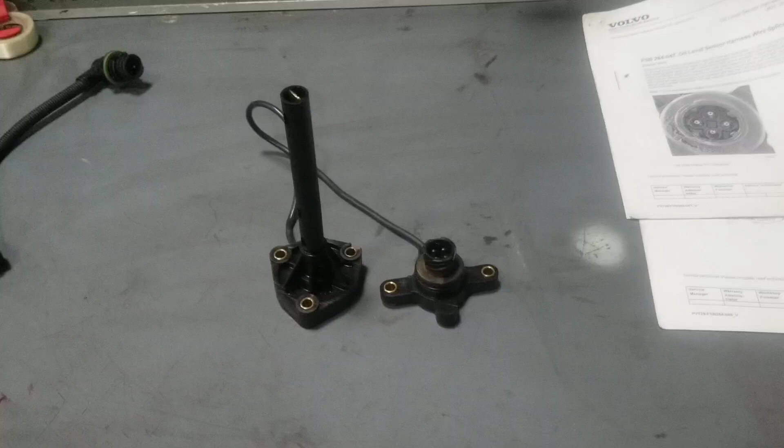Hello, this is an oil level sensor. It is located at the bottom of your oil pan. So it's installed, it sits right about something like this. Bolts down right there, the wiring goes up. Here's the sensor, and it sits next to the dipstick, and this is the fill tube that goes in there.

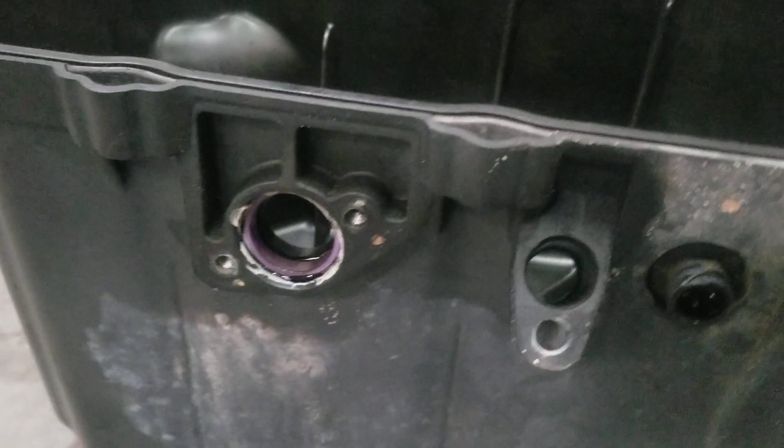So I'm going to talk about the sensor a little bit, and then I'll take it apart. Probably not much to see, just a bunch of plastic. Probably have to break it to take it apart. And the sensor is most likely not going to cause a check engine light.

It probably won't do a check light, and you won't be able to read the oil level, and you'll see it when you look for the codes. You'll see it there. Other than that, it doesn't really show up as a problem unless you're looking to check your oil level.

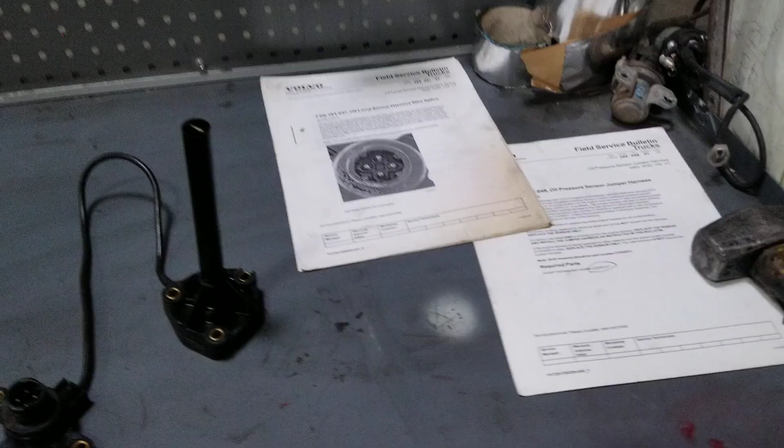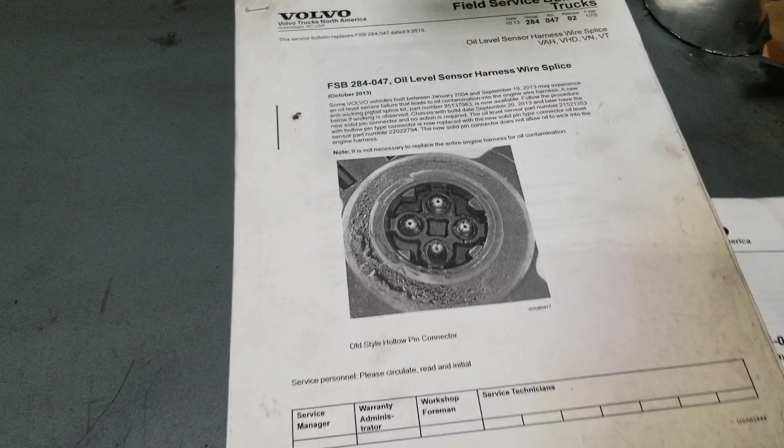I got two FSBs on this sensor. They're kind of old, but if you have an older truck with still an old style sensor in there, should be some good information. So what you're looking for is, this is a picture of a connector. It's an old style connector, pins inside the oil level sensor.

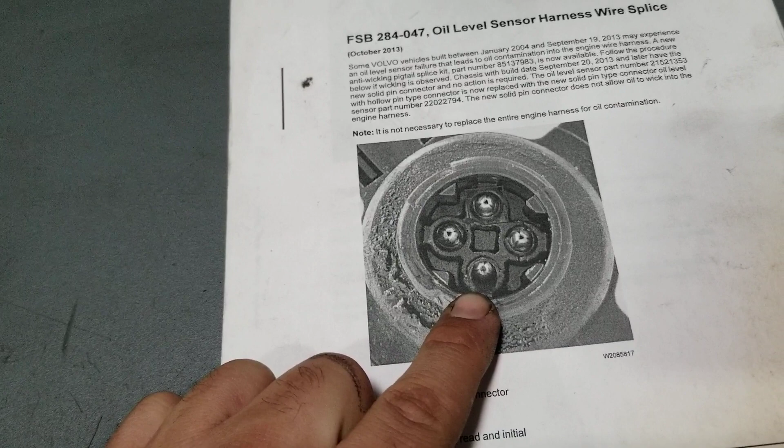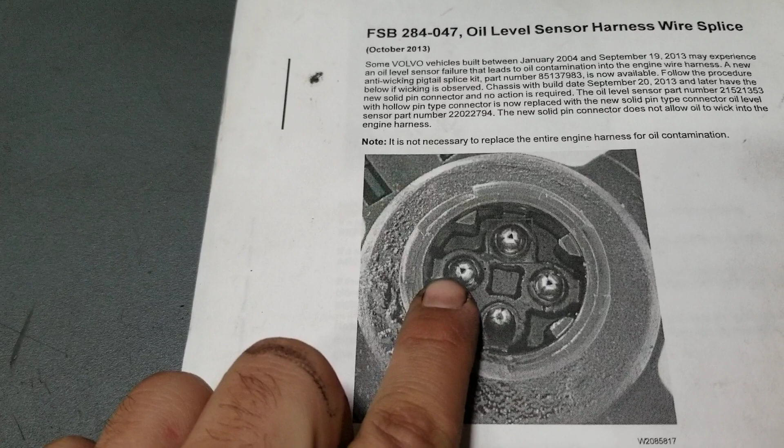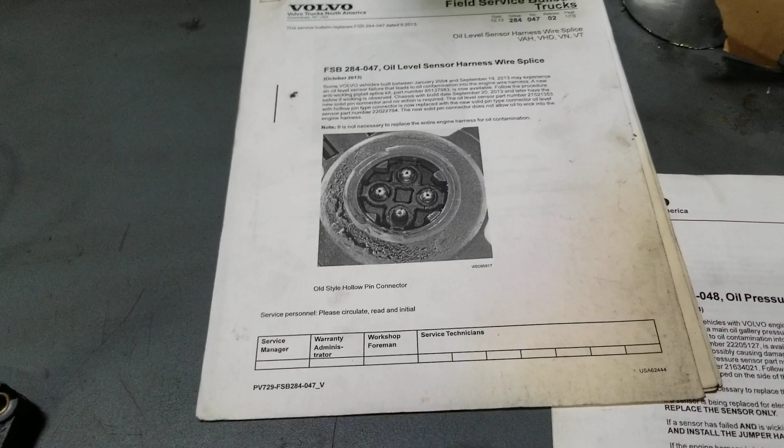This is the old style. You notice how there's a hole inside the pin. The reason why they got rid of the hole inside the pin is because they had oil come out through the sensor, through the wiring, wick all the way up into the engine harness, and then goes into the ECU, and you have all sorts of weird codes until you clean out the connector, and then you're okay for a while - it's a temporary fix when you clean out.

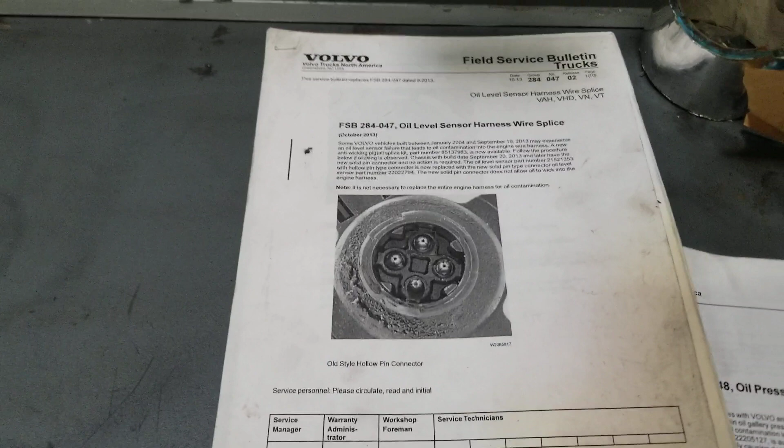So the procedure to fix that would be installing a wicking harness. It's like a jumper harness that prevents oil from going down into the sensor after you replace the sensor. You can also use this as a tool. I use it as a tool. I have two of these.

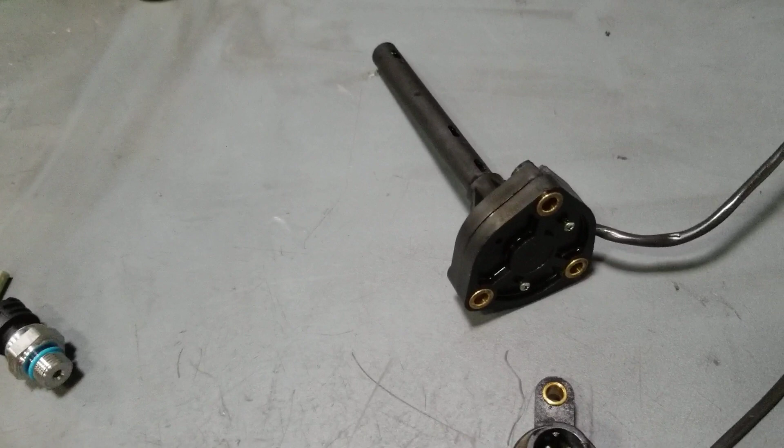Also, part numbers. This part number of this oil level sensor is 220-22794, but that's the old one. It supersedes to 220-7993. Mack and Volvo are the same, and I'll list that in the description. Someday I will figure out how to put part numbers on the screen so you don't have to go to the description, but I'm working on that one.

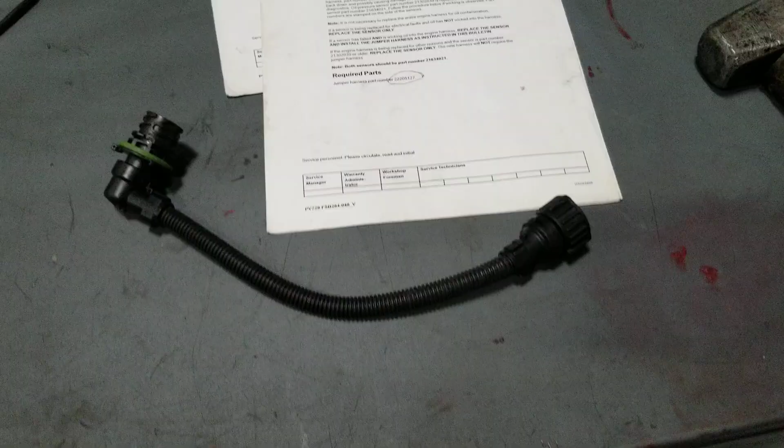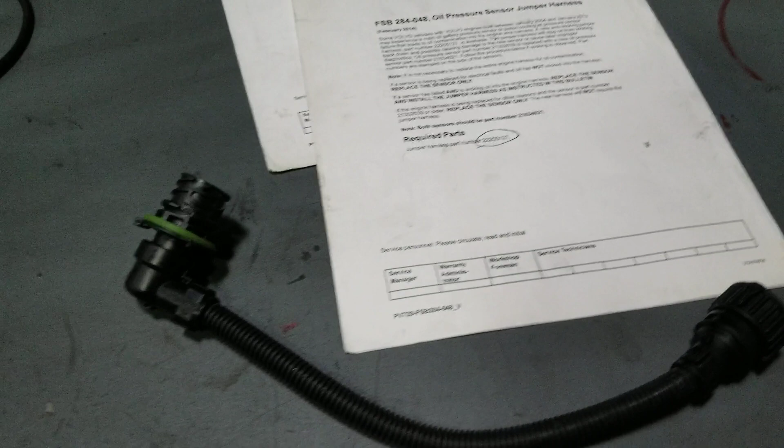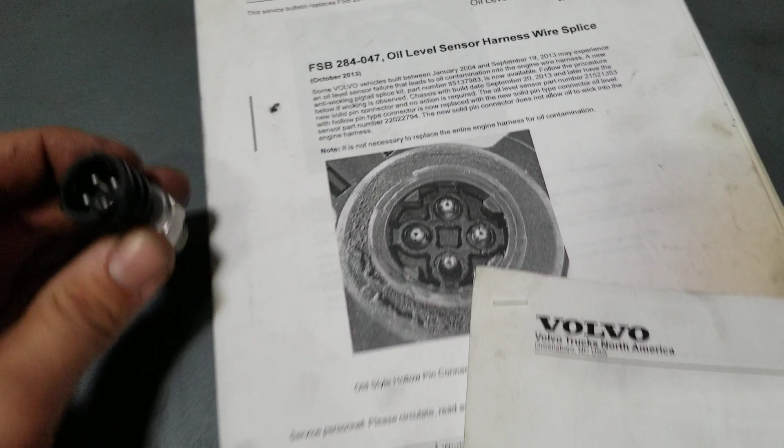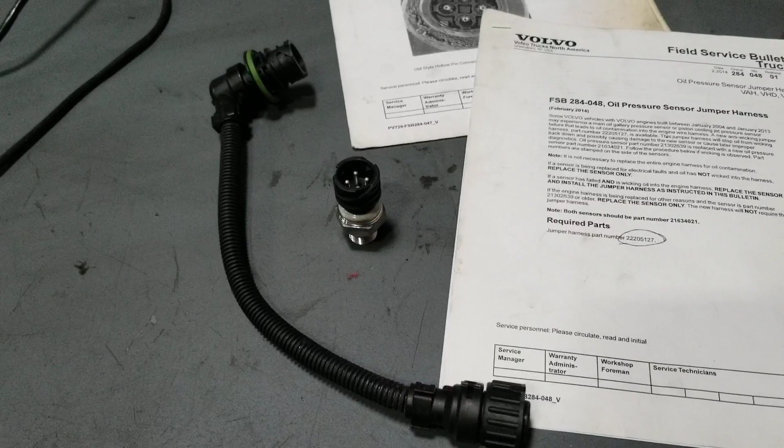Alright, the part number for this anti-wicking jumper harness is 222-05127. If you want to get it, I just checked - I'm in Sacramento, and they have two in stock, so they still sell them if you have this problem. And this jumper anti-wicking works for engine piston cooling pressure and engine oil pressure. Kind of a long description of it, but anyway, they had a similar issue with the pins having holes. You replace the sensor, and if you have oil inside the engine harness, you want to install it anti-wicking. Unless, or other fix for that is, you need to replace the whole engine harness.

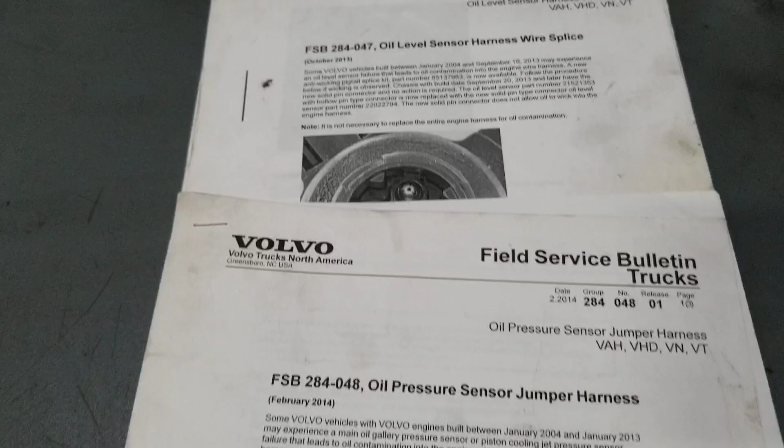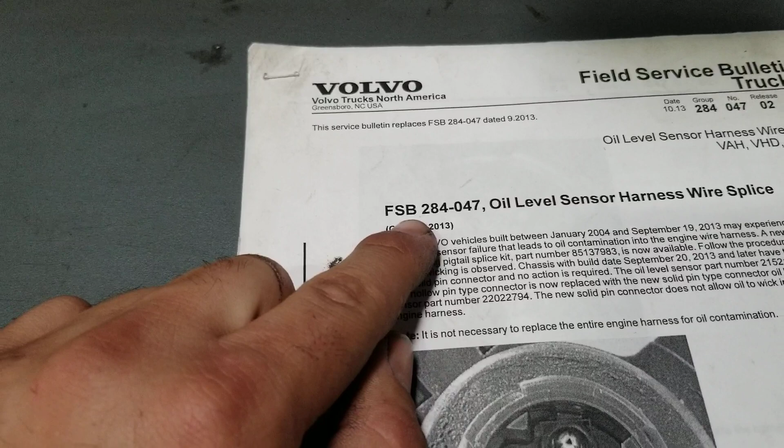Also, I think I'm going to, in the description, leave the field service bulletin number, which is right there. That's for the jumper harness. And then this one is for splicing or putting another end on your existing engine harness. These might be old, but this is just for information purposes.

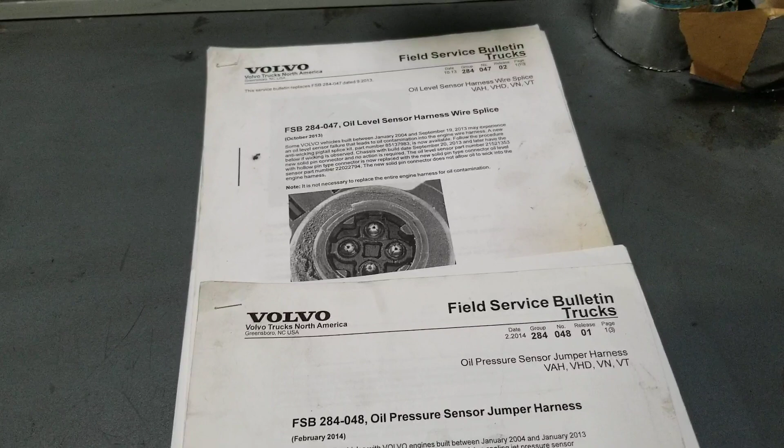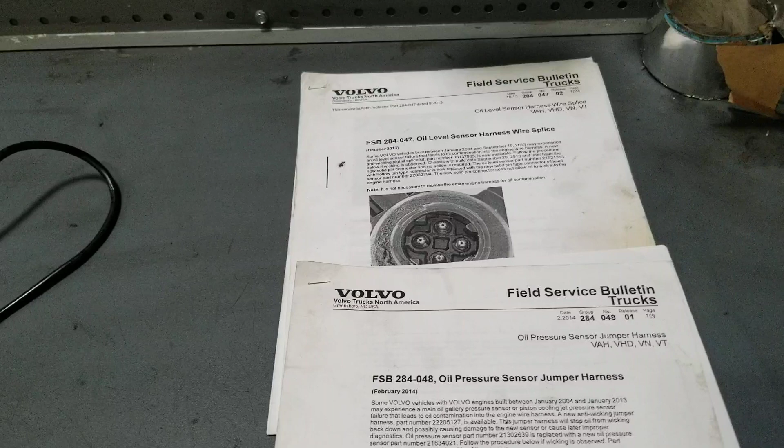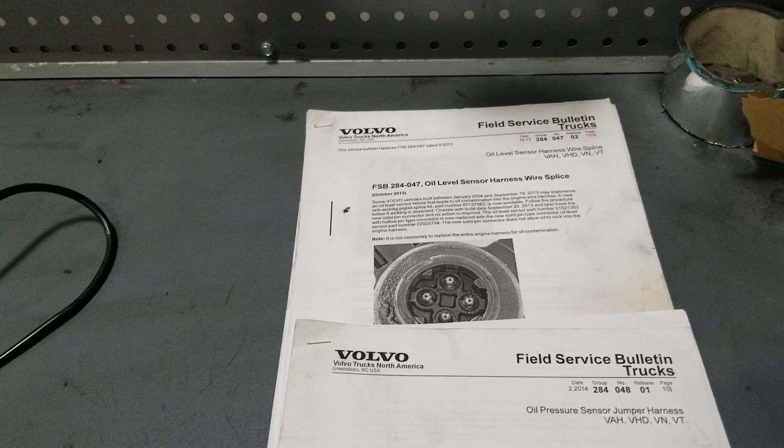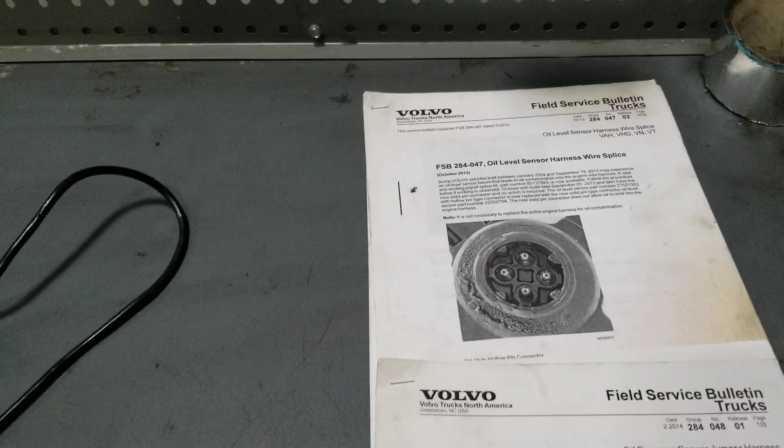By now, this is 2019. A truck with this harness probably would need to be replaced because of oil going down from the injector harness, and also under the valve cover because of the heat. The injector harness insulation flakes off, and you have electrical codes for fuel injectors. So you probably need to replace the harness, but if you need it, I will leave it in the description.

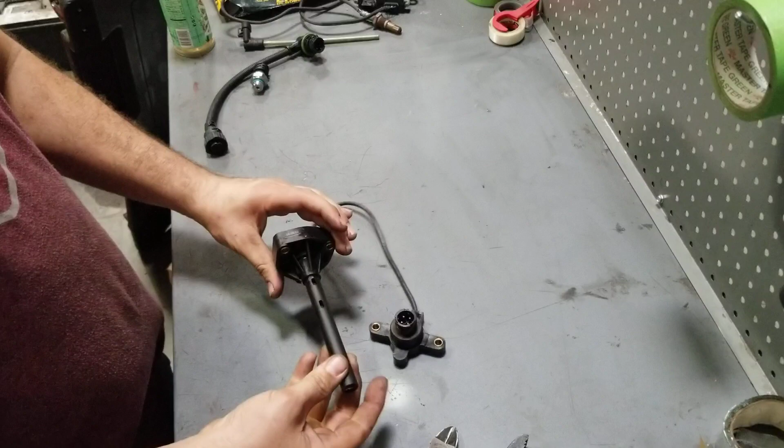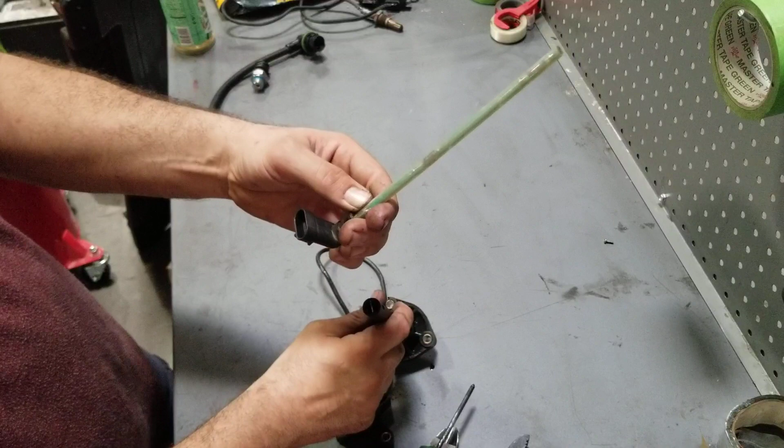Alright, now I'm going to try to take it apart. Most likely it's going to break, but why not take it apart? See what's inside. I like to take things apart to see what's inside. Kind of gives you a better idea when you're working on them. This probably has a similar level system, it's like a circuit board. This is a coolant level sensor. It looks like it's similar inside. Let's see.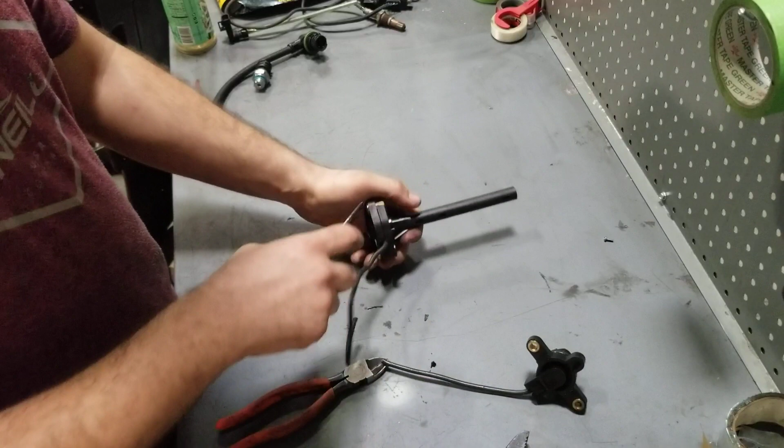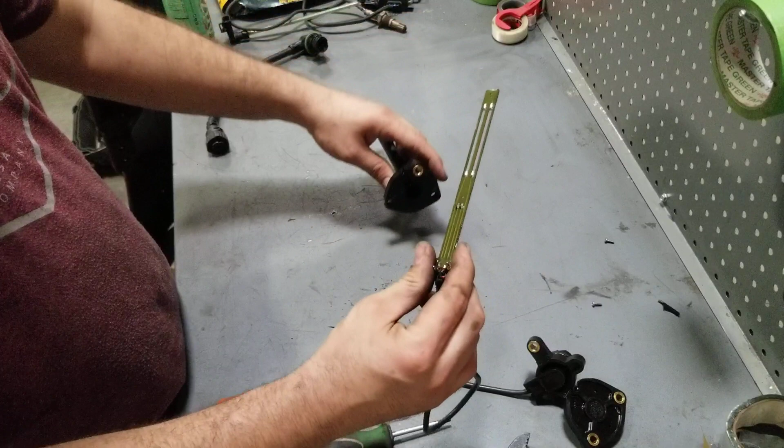It is a 4-wire. Oh, it's coming apart. That's nice. Oh yeah, there's this, almost like a circuit board. And just wiring. A lot of times you have 4 pins, but it's not - it is 4-wire. That's cool. Whatever.

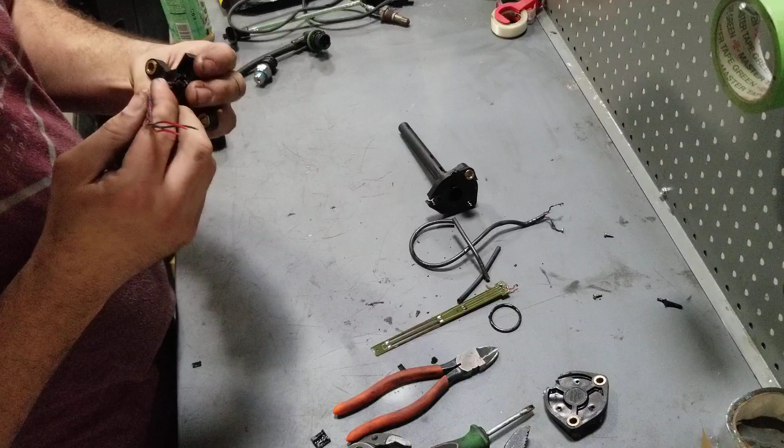We have the O-ring, keeps the oil in the oil pan. Then let's see what we can do here. That came off. Really comes apart, it's kind of molded - everything's molded in there. It's constantly in oil.

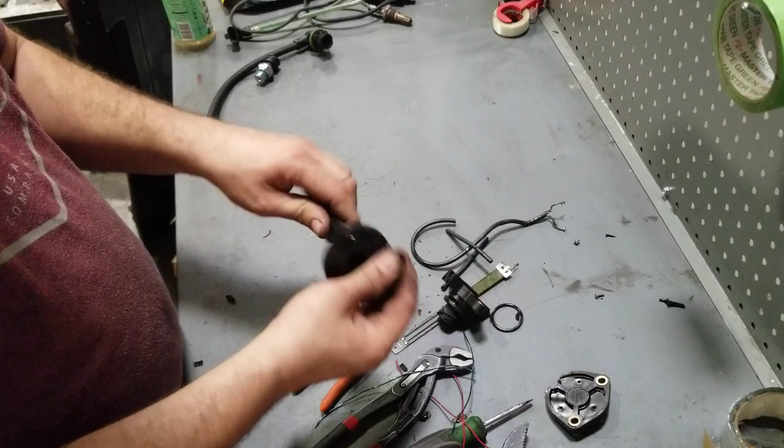I think this is about it. Really nothing to it. But yeah, they don't fail often. But I mean, normally if they fail electrically, they don't read oil, or you just have a bunch of oil leaking outside, that's when you need to replace it. Depending on your account and where you're at, roughly about $100 to $165.